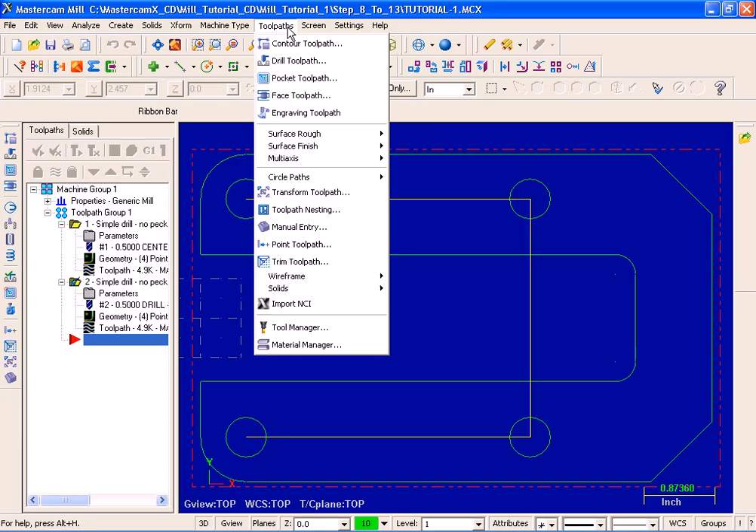Let's start on step 8, contour the outside profile. I'm going to move up to the top of the screen and select Toolpaths, and then pick Contour Toolpath. The prompt says select contour chain 1.

I'm going to move over to the graphics screen and select this left vertical line at the top. As you can see, the arrow is pointing in the correct direction. This is the direction I wish to contour the part. If it had the reverse direction, you can move over to the left at the bottom of this dialog box and reverse it. My direction is looking great, so I'm going to select the OK button.

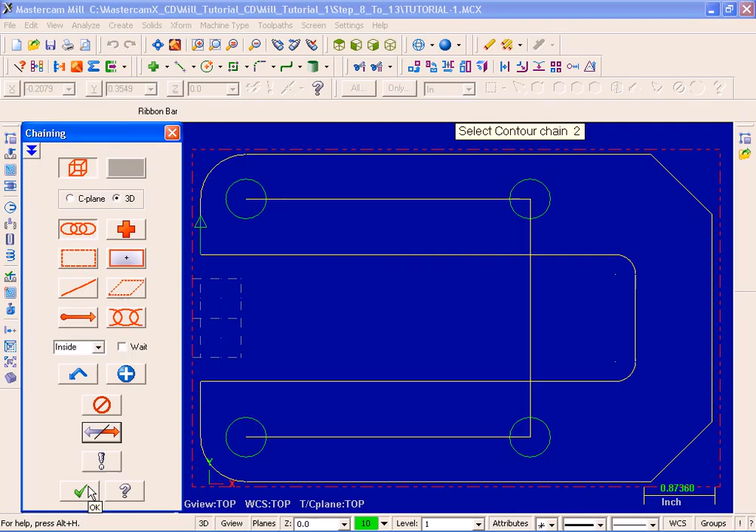Next, we're going to select a tool. We're going to use a 1/4 inch diameter flat end mill.

First, I'm going to move down to the bottom of this screen and select Library Tool. Next, I'm going to select the Filter button. Then moving over to the left in the Tool Types area, I'm going to select None to disable the tools, and then moving up to the top left corner, I'm going to select Straight End Mills.

Moving over to the right in the Tool Diameter section, if I open up this drop down menu, we've got several options here, but I'm going to leave it to equal, and the dimension 0.25 stays as is. Moving down, I'm going to select the OK button.

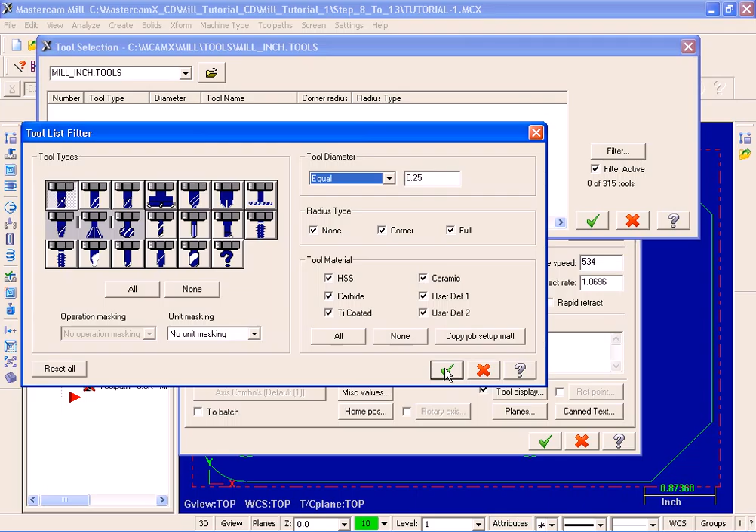As you can see, we filtered out a 1/4 inch flat end mill. I'm going to select this end mill. This is the one that we're going to use, and then hit the check mark.

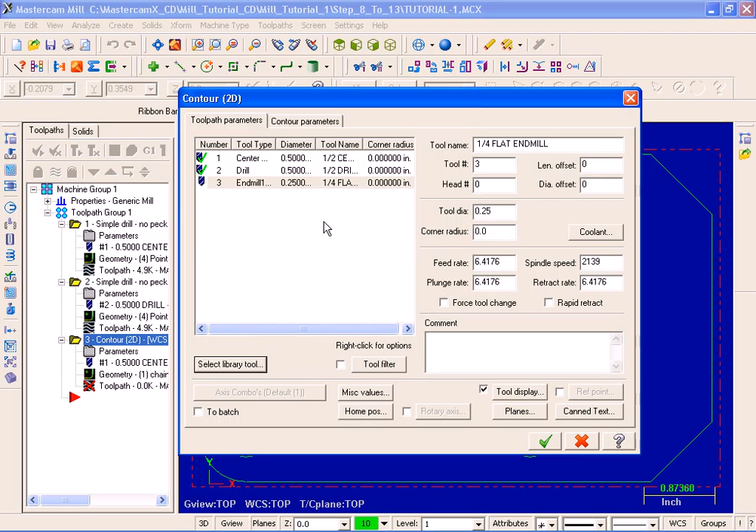Back in the Toolpath Parameters page, you can see Tool 3 is selected. I'm going to move over to the right and change the length offset to 3, and then put in a comment: Contour the profile. Let's move on to the next page, Contour Parameters.

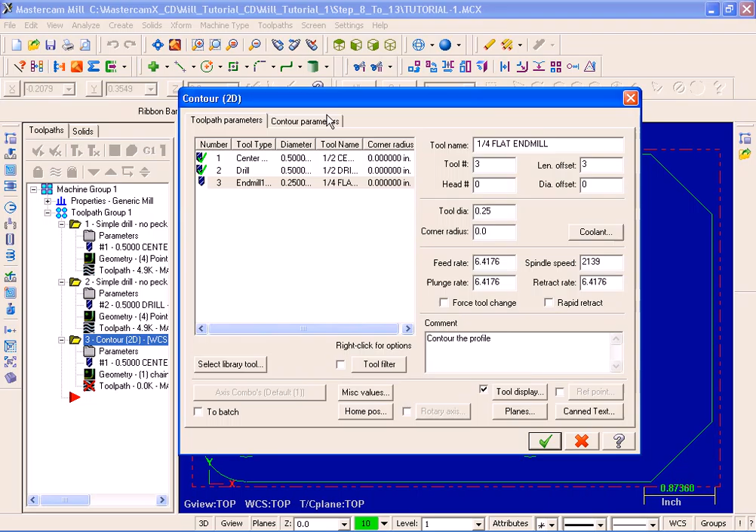Starting at the top, I'm going to turn the clearance on. I'm going to leave it at 2 inches, set to absolute. Moving down, there's a check mark against retract, set at 2.5, also in absolute, so that looks good. My feed plane is incremental and set to 0.1, so that's great. Moving down, top of stock is set to 0 and in absolute.

For the depth, I'm going to change it to -0.5.

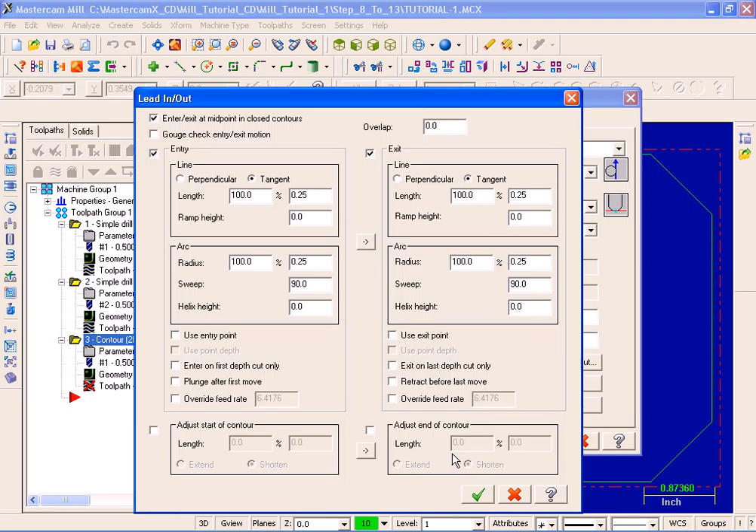Moving to the bottom right hand corner of this dialog box, there is a check mark against lead in, lead out. I'm going to click on this button, and as you can see, we have entry checked and exit checked for our lead in and lead out. Everything looks good here, so I'm going to go down and select OK, and also select OK here as well.

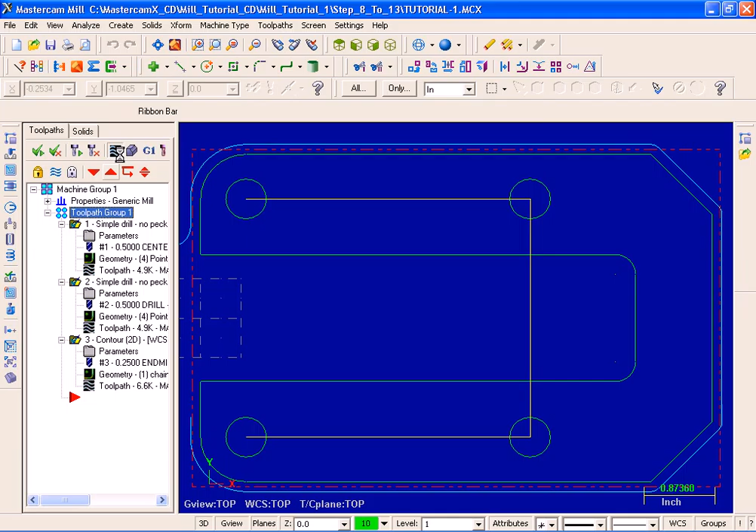Now in step 9, we're going to backplot the toolpath. Moving over to the left, I'm going to select Toolpath Group, and you can see there is now a check mark against the 3 operations: center drill, drill, and the contour operation.

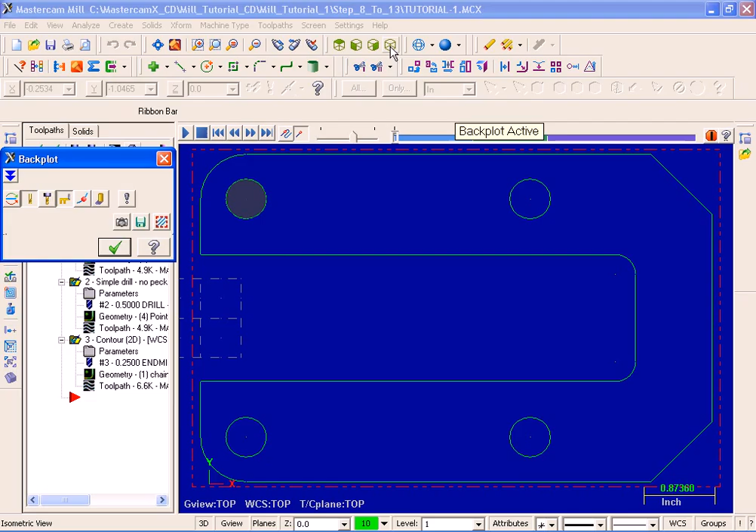I'm going to move up to the top and select the backplot option. In the backplot dialog box, I have my display tool turned on and also display rapid moves. Let's move up to the top now and get an isometric view, and I'm also going to do a screen fit.

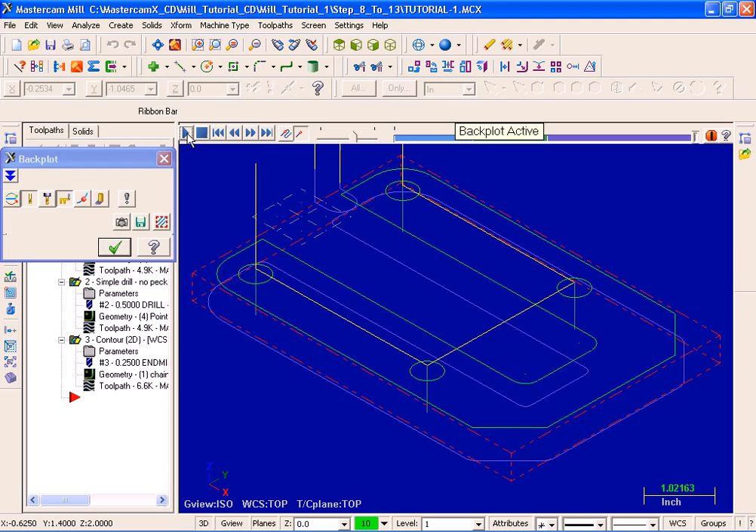Let's select the play button, and you can see our holes being center drilled, and then contoured. Everything looks good here, so I'm going to move over to the left and hit the check mark for backplot.

Let's move on now to step 10. What we're going to do is modify this toolpath to add 2 depth cuts, 2 roughing passes, and 1 finish pass.

Moving over to the Toolpaths Manager, I'm going to select Parameters in the Contour operation. As you can see, I'm on the Contours Parameters page. Moving down to the bottom of this screen, I'm going to put a check mark against multi-passes and depth of cuts.

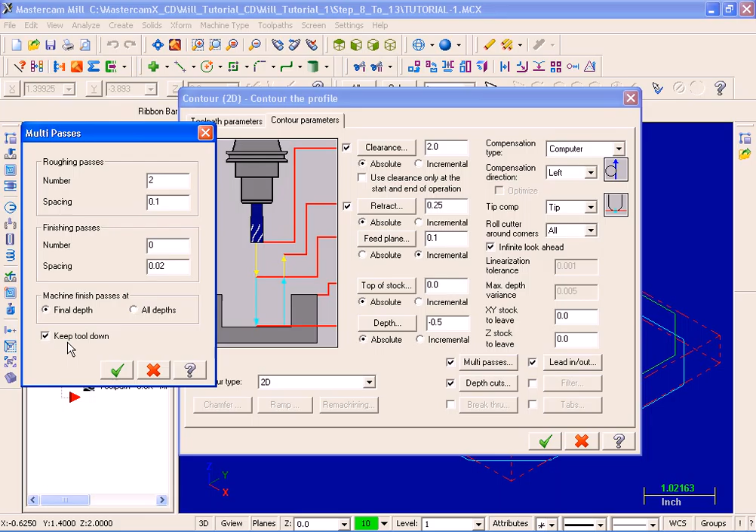Next, I'm going to move into multi-passes by pressing the button, over to the left in the multi-passes dialog box. For roughing passes, I'm going to change that to 2. The spacing I'm going to leave at 0.1. Finish passes I'll leave at 0, but the spacing I'll change to 0.02. Moving down to the area for machine finish passes at, I'm going to change it from all depths to final depth. And one last thing, I'm going to put a check mark against keep tool down.

Everything's complete. I'm going to hit the OK button and then move over to the right and click on depth of cuts.

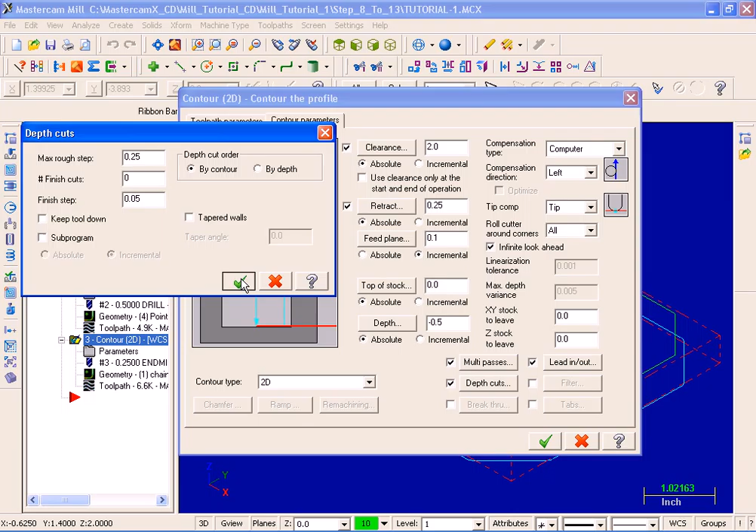Now for my maximum rough step, it's set at 0.5. I'm going to change that to 0.25. Moving down, I've got number of finish cuts 0, finish step 0.05 - I'll keep that as is. My depth cut order is set to by contour, so everything's looking good here. I'm going to move down and pick OK.

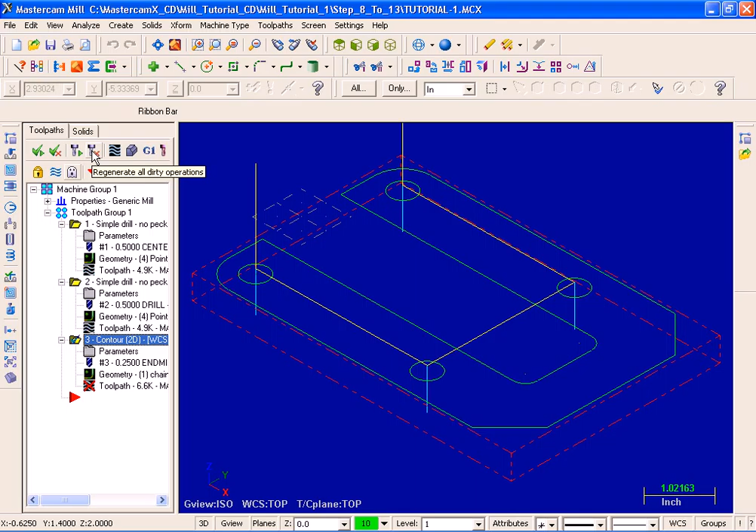I'm going to select the OK button to exit. Now you can notice there is a red cross against this last operation. What I'm going to do is move up and select Regen All Dirty Operations. And you can see now that red mark has disappeared - we've regenerated successfully.

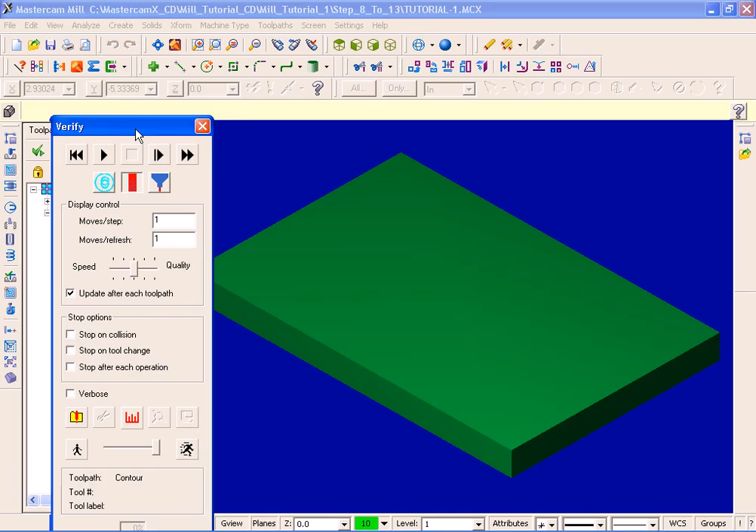Let's move on now to step 11, and what we're going to do is verify. I'm going to move over to the top here and select all operations, and as you can see there's a check mark against all 3 operations. I'm going to move over to the top and select the Verify Selected Operations.

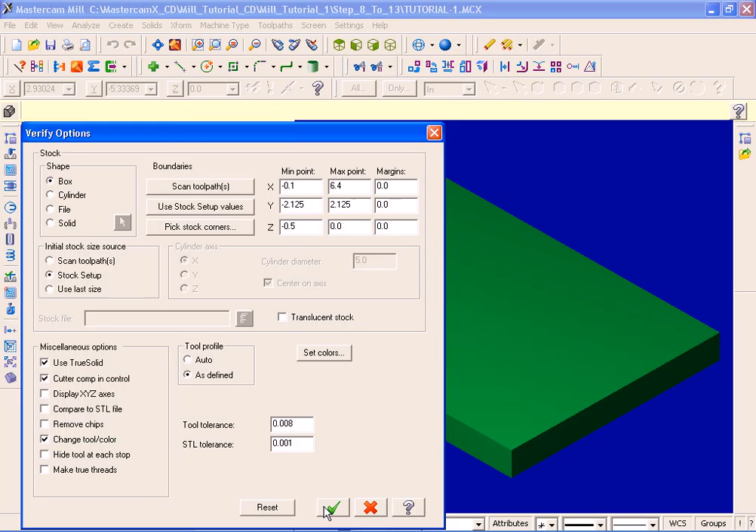First of all, I'm going to select the config button down at the very bottom here. Some of the things I want to check out - as you can see, my stock shape is a box, and I'm using my stock setup values. Moving down to the bottom left, I'm going to change tool color, turning that on so each tool picks up a different color. Everything looks good here, so I'm going to go down to the bottom and hit the OK button.

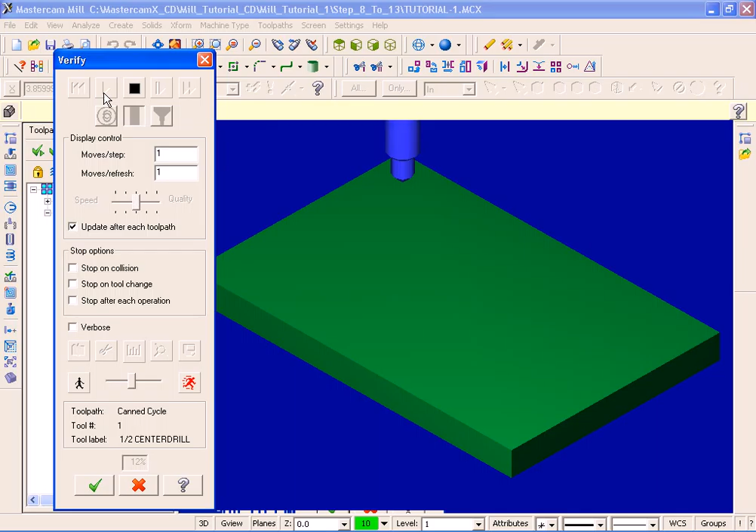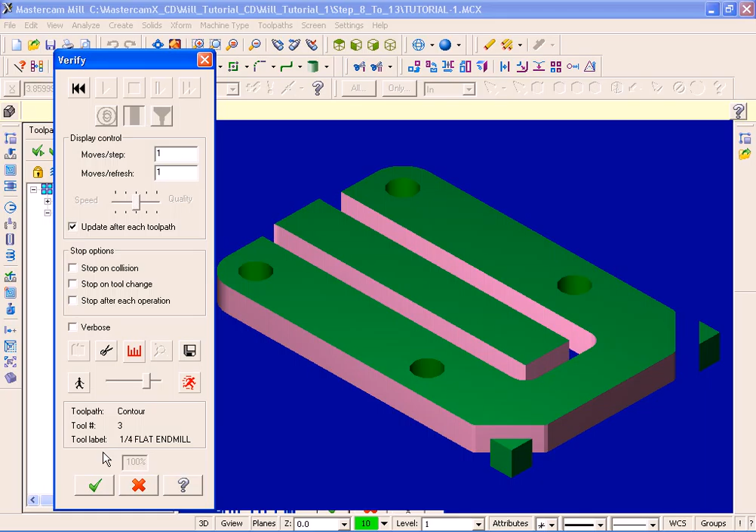I'm just going to reposition my dialog box. Now the speed - this slider bar I'm going to move into the middle, and now select the play button. As you can see, it's roughing and finishing our contour with the 1/4 inch diameter end mill. If you wish, you can move over and move the slider bar to the right to speed up the operation. Everything looks great. I'm going to go down to the bottom of the Verify dialog box and hit the check mark.

Let's move on up and save our file. Everything's looking good.

Next, what we'll do is move on to step 13, the final step of this video, and post the file. As you can see, we have all 3 operations check marked. What we're going to do now is create the CNC code by picking the Post Selected Operations button at the top.

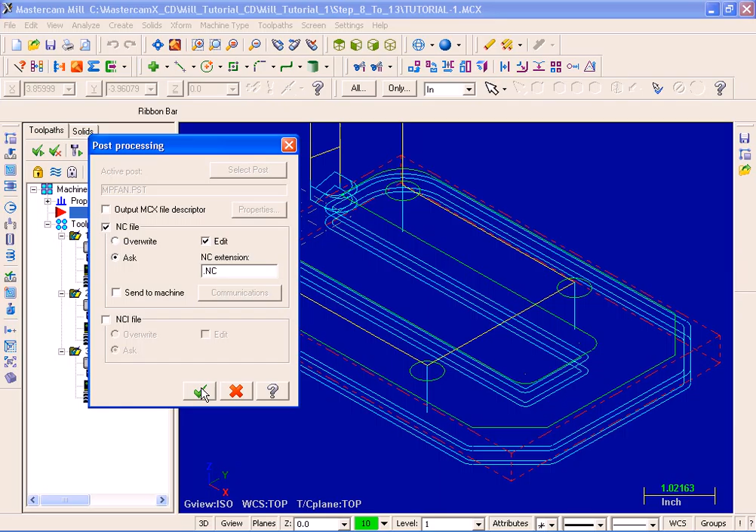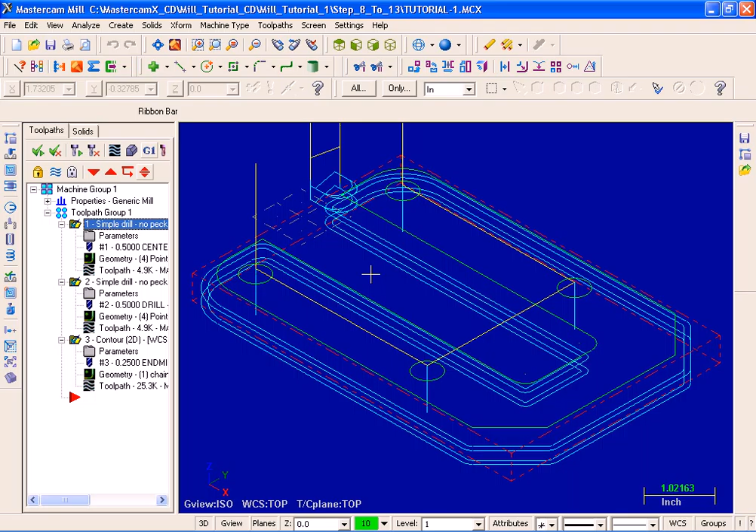When this next window comes up, there's nothing I need to change here. I'm using the default post MPFAN. Everything's looking good. I'm going to go down to the bottom, hit the OK button. For the name of my file, I'm going to type in Tutorial-1 and then click Save.

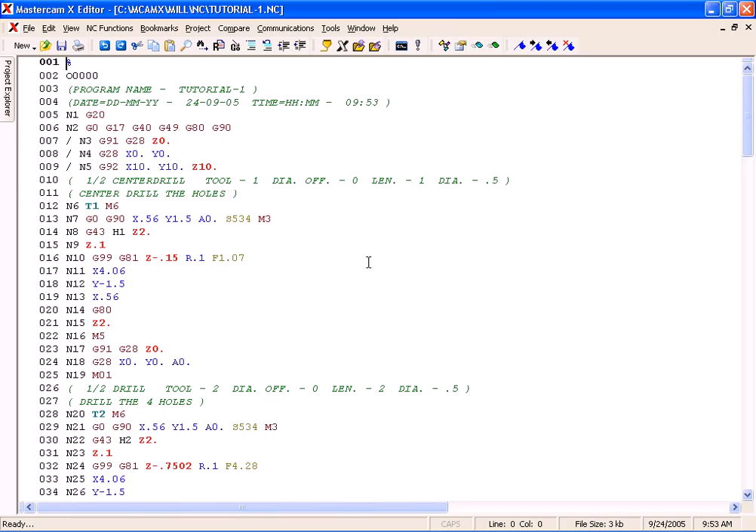And finally, my CNC code appears on the screen. This is the end of this video segment. Thanks for watching.